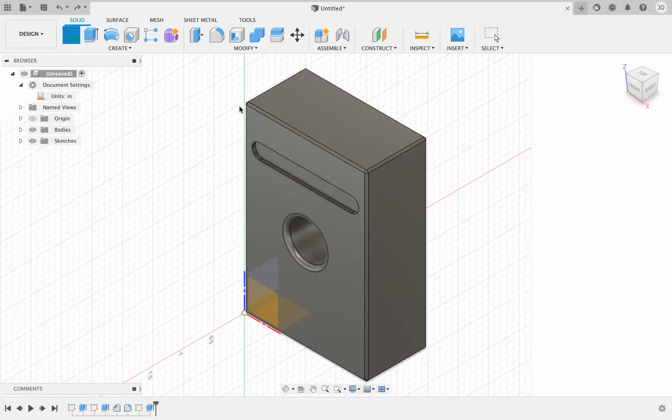So what we want to do is we want to go create sketch. And it's a little tricky. We could actually just choose the face plane of our 123 block. But to do it correctly, let's go inside of here. Make sure you get the bottom of the slot that we cut. So we'll click on that. And it's a good idea to zoom in, make sure it's filling your screen so that it's easy to work on.

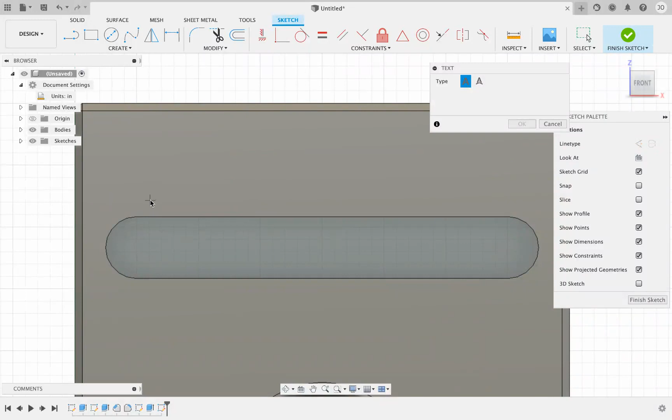And to add text to this, we're going to go ahead and choose the Create tab. And about 2/3 of the way down, you'll see text next to the letter A. Go ahead and click on that. Fusion has updated this a bit compared to what it was. I did a tutorial on this earlier. It's actually Fusion 360 Part 8. And it was a little more cumbersome to use at that point in time. Since then, they've made some nice updates to it.

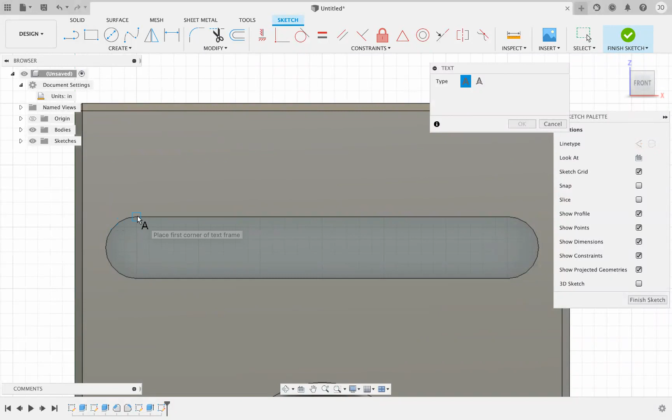So now, when we use it, we're actually going to create a text box just as you would in any other text editing program or graphics program, rather. And if I pick up the end of the slot, this is where the radius meets the line, and then go down here and snap to the other one. Right, I've got a nice little text box there. And the convenience here is that it's also going to help us center the text inside of that box.

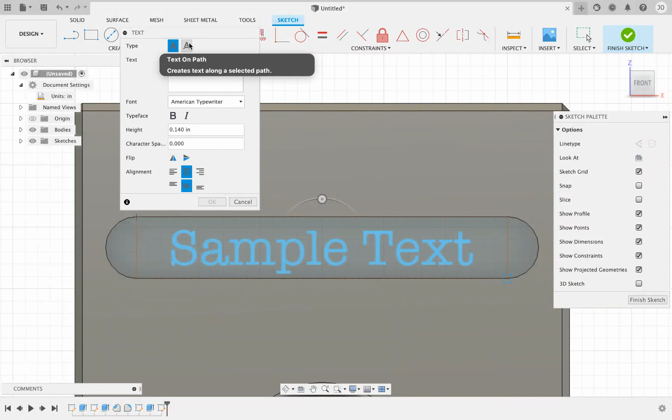Inside of my text menu, we're going to leave it set on regular text. You can use text on a path now, which is also nice. I've done that for some parts. But for our instance, let's keep it simple. And for my students, we type in our last name. You can do all capital letters or lowercase or whatever you choose. And we're going to select a font.

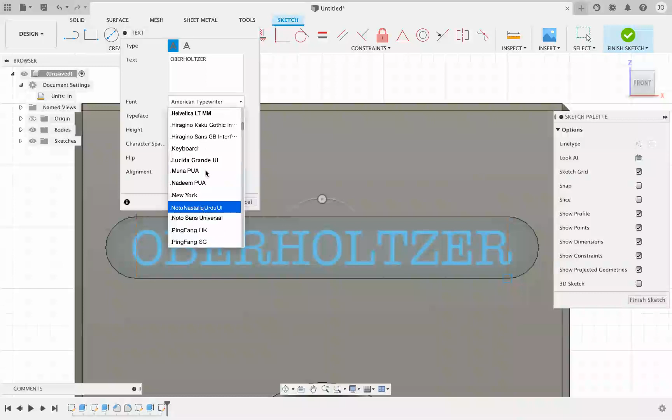Now, one of the things I always want to point out with font is that Gothic fonts work the best, typically. Okay, and a Gothic font, of course, doesn't have these serifs on, these lines on the tops and bottoms of letters. Now, in this instance, this is American Typewriter, and because it's a fairly simple font, it works pretty well. But where we run into trouble is when people try and use scripts or more ornate fonts. It doesn't always like them. It doesn't like to extrude them. So try and stick to simpler fonts if at all possible.

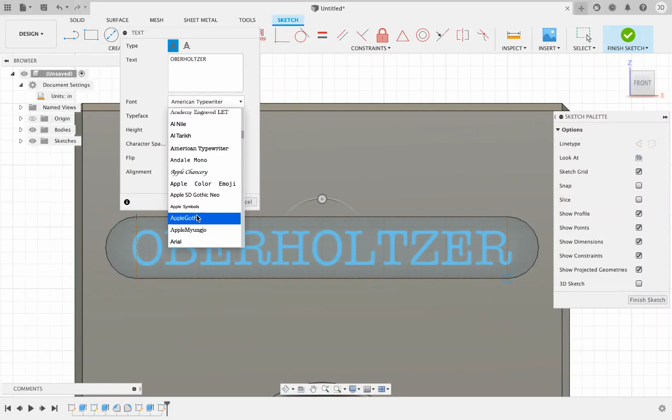And if you're going to be using something like a CNC mill to create these letters for real, you're not really going to want something like this anyway, in most cases. You could technically 3D print this stuff, though, relatively easily. It is possible. So let's find something that we'll use. Maybe we'll just go up here and, I don't know, we'll use Apple Gothic. That's what's there. You do, in some cases, have the capability to make it bold, or you can make it italic. In this instance, neither of those are available.

And then for changing the text height, unlike the printing industry, this is doing it in inches, which is kind of typical for CAD and technical drawings. And you're going to have to play with the height to make it appear the way you want. So if I go something like 0.15 inches, it gets a little bit bigger. We'll try 0.16. I'd say that's a good size, kind of has some good space around it.

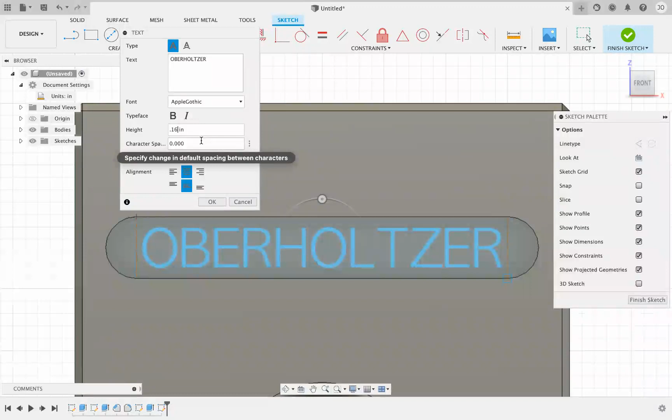And then character spacing, you can stretch out if you so choose. I'm not going to do that. It fits nicely. All right, we have no need to flip it. You can change exactly where it's positioned within the text box. Okay, so justify left, justify right, center justify, just like any document program. And then, of course, we can also do our alignment from top, center, or bottom.

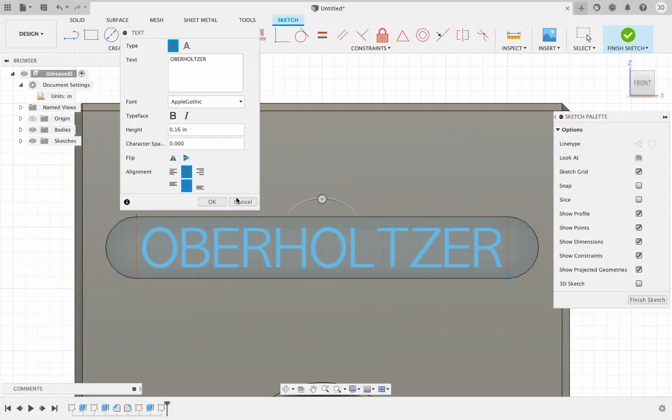In our instance, we want to justify center and we want to use align in the middle, and that will place it right in the middle of our slot. It's as easy as clicking OK. And that's all you need to do for the text. You can select Finish Sketch, so big green check mark. And then we'll select our home button up here to flip back into isometric. And you'll notice that the text is just printed on the surface of the block.

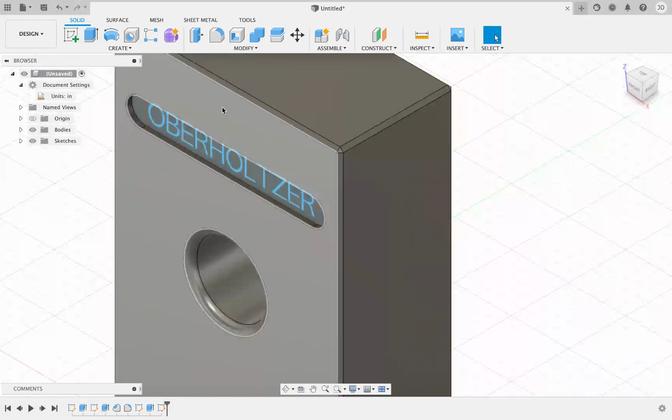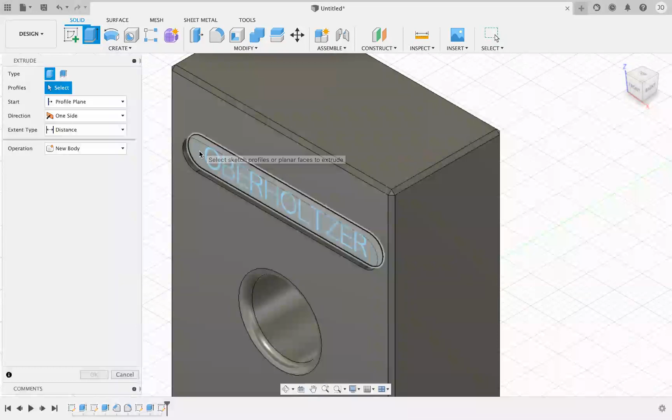Now, in order to extrude it, for whatever reason, Fusion likes to pick up this slot when we go to extrude. You have to turn it off before you can select the text. So when I choose extrude, you're going to notice that the entire slot is highlighted. If you do that, you'll get a solid slot moving in or out. So select outside of your text, but inside of the slot to turn that off, and then hover over the text. It'll turn dark blue.

And now we have a couple options. We can emboss the text. So if I type in something like 0.05, we get a nice extrusion there, and I click OK. And you'll see that the text, of course, is popping out of the block. All right. And again, you could 3D print this very easily. In fact, the text in Fusion 360 tends to print pretty well, unless they're really narrow letters, or again, unless it's a crazy font that the 3D printer has trouble with.

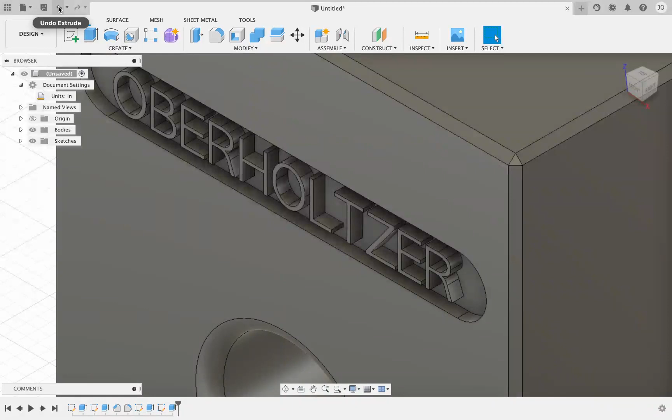If we revert back and we choose extrude again, we'll deselect the slot, choose the text again. We can engrave it, and I might go minus, say, 0.03 inches, so 30 thousandths of an inch. And we have some nice engraved text in there. Again, doable on something like a CNC mill, or you could 3D print this as well.

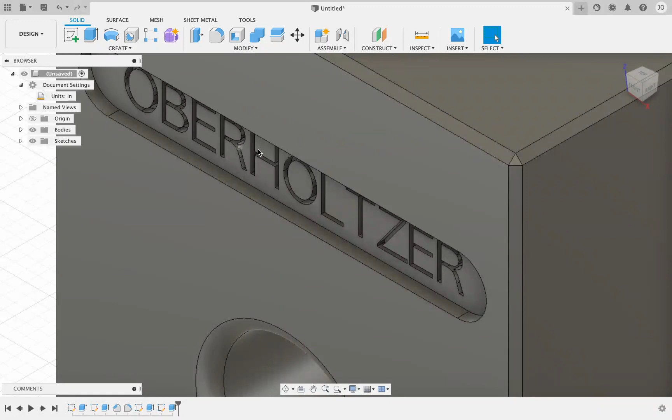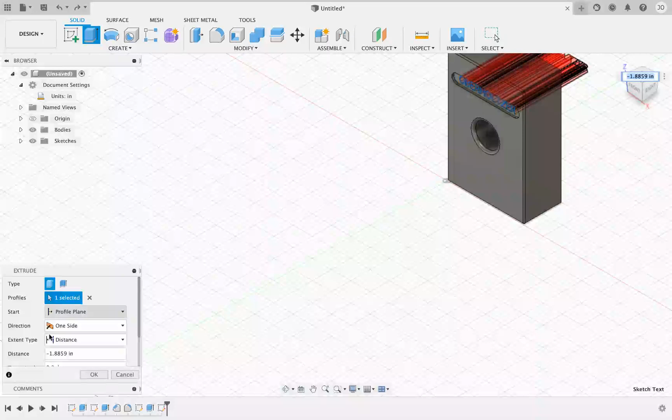And of course, the fun one that everybody wants to try is we can also click extrude, and we can deselect the slot again and select the text, and we can actually pull it, if I zoom out a little bit, the whole way through the block. And when you do that and click OK, you'll notice when I turn the block, we can now see right through it.

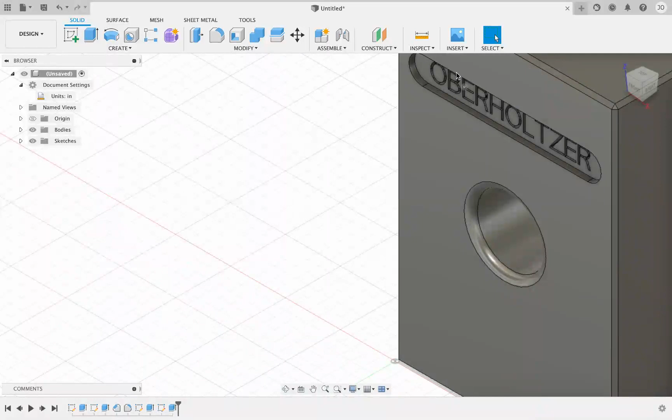The only thing you need to be aware of with this is this idea that this is an impossible object. And what I mean by that is if we take a look at where the letters are, the centers of the O's, the part of the R, those points, the centers of the B's would all fall out because there's nothing there to actually hold them in. All right, so you would have an empty letter in here.

You would get around that by doing what you see on stencils, where you would add a little web, perhaps up in here, maybe one on here, one in here. Doesn't look quite as neat, but you could do it if you wanted to. But it is a neat thing in theory to show students. Just a little fun, happy side note too.

On a 3D printer, it would definitely print these letters as they sit right now. But when you took the block off the 3D printer, these would stay behind. So same issue. So I hope that helps with extruding and embossing text. There are some other features that are a little more advanced, but this will get you going for at least putting text on your projects.